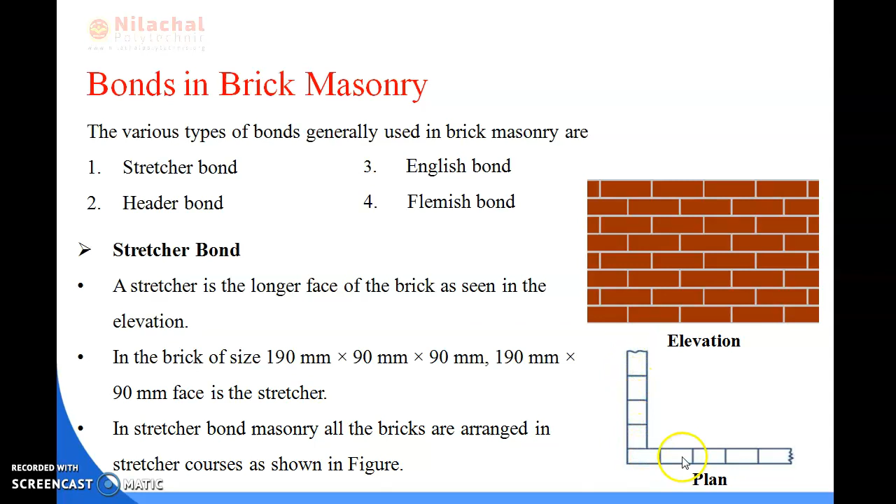In the brick of size 190 into 90 into 90, the 190 into 90 mm face is the stretcher. And in the stretcher bond masonry, all the bricks are arranged in stretcher courses. You can see here in the stretcher bond, all the bricks have been arranged in the stretcher courses. This is known as stretcher bond. This one is the elevation part, and this is known as plan. We can say the longer face of the brick has been placed in the brick masonry.

So next one, that is header bond. Header bond means it is the shorter face of the brick, as shown in the elevation diagram. You can see here the diagram. This is the shorter face of the brick. In the header bond brick masonry, all the bricks are arranged in header courses. You can see here the bricks have all been arranged in the header courses. This is the plan part and this is the elevation part.

And this is the isometric view of the stretcher bond and the header bond. This is the stretcher bond and this is the header bond. The longer face of the brick is shown here, and the shorter face of the brick is shown here.

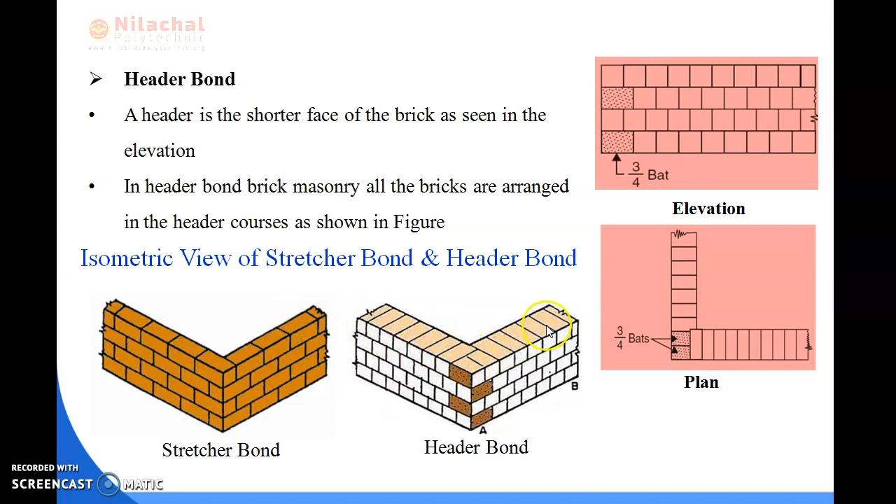So next we'll be reading about English bond. So what do you mean by English bond? In alternate courses, it consists of header and stretcher. You can see here in this line, this is row 1, row 2, row 3, row 4, row 5, row 6, row 7. If we take this one, we can say this is the header and this is the stretcher part. Same, this is the header part, and the fourth, this one, is the stretcher part. It consists of alternate header and stretcher.

So we can say the English bond is the strongest bond, and it is commonly used for walls of all thicknesses. To break the continuity of the vertical joints, a brick is cut lengthwise into two halves and used in the beginning and end of a wall after the first header. This is called queen closure.

As I have discussed with you about the queen closure, you can see that in this part the queen closure has been placed, and in this part also. So to break the continuity of the vertical joints, the brick is cut lengthwise into two halves and used in the beginning and end of a wall after the first header. This is called queen closure.

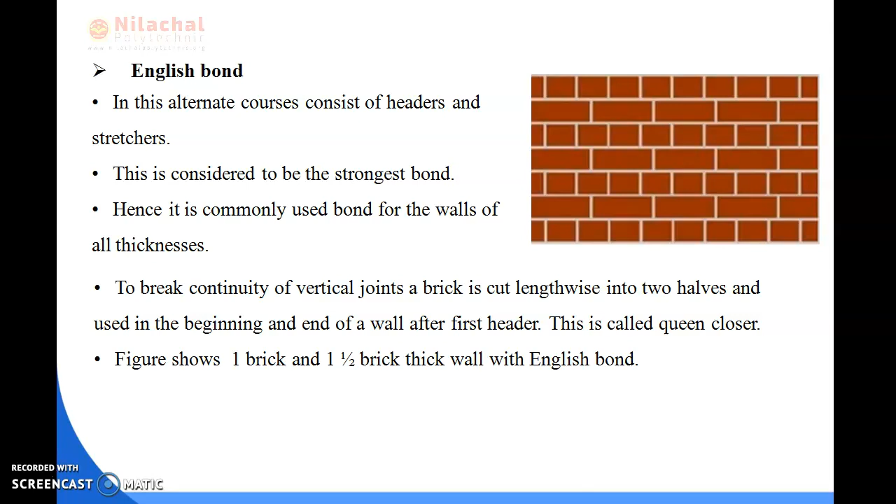Next figure here, these are the figures of the one brick thick wall and the 1.5 brick thick wall. If we construct the one brick thick wall, this is the elevation part. This is known as header. Next, this is a stretcher. Same procedure, header, stretcher, header, stretcher. This is the plan of the stretcher courses, the face part and the back part, and this is the plan of the header courses, the face part and the back part. This is known as one brick thick wall.

And in the 1.5 brick thick wall, this is the elevation part. You can see here, this is the brick header that has been placed, and this is the stretcher part. Next, same, header, stretcher, header, stretcher. So this is known as the elevation part. And here comes the plan of the stretcher course in the 1.5 brick thick wall. This is the face part and this is the back part.

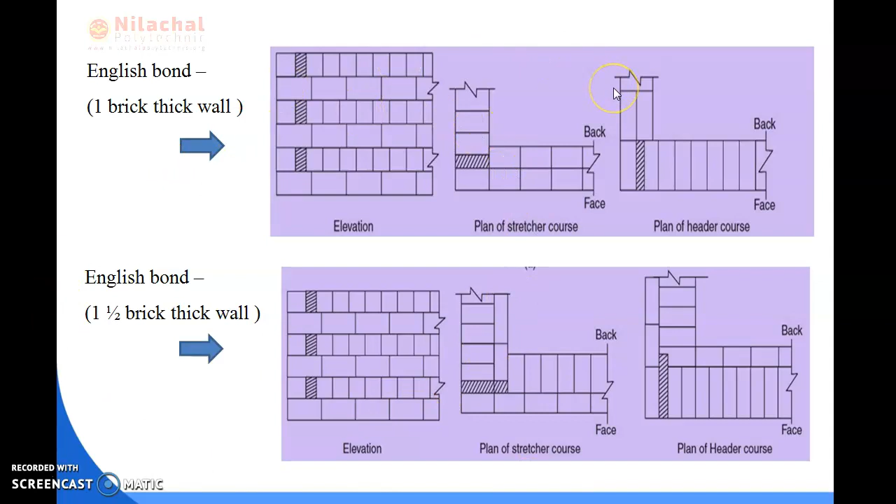And next here comes the plan of the header courses. This is the face part and this is the back part of the brick masonry. Okay, so this is all about the English bond of 1 brick thick wall and 1.5 brick thick wall.

So next we will be reading about Flemish bond. In this type of bond, each course comprises of alternate header and stretcher. Alternate courses start with stretcher and header. Each header is placed centrally between the stretcher immediately above and below to maintain an even bond. To break the vertical joints, the queen closures are required.

Okay, you can see here in this diagram, in this type of Flemish bond, each course comprises of alternate header and stretcher. We can see that this is the stretcher part, next header, stretcher, header part. The next same procedure has been followed. This is the header part, this is the stretcher part, header part, stretcher part.

So alternate courses start with stretcher and header, and each header is placed centrally between the stretcher immediately above and below to maintain an even, or we can say to maintain a Flemish bond. So to break the vertical joints, the queen closures are required.

Okay, so next we will be reading about important terms of stone masonry. What are the different terms of stone masonry? So first is string course. It is a horizontal projecting course of masonry projecting out of the face of the wall for shedding rainwater off the face. It imparts an aesthetic appearance to the structure and is generally provided at every floor level.

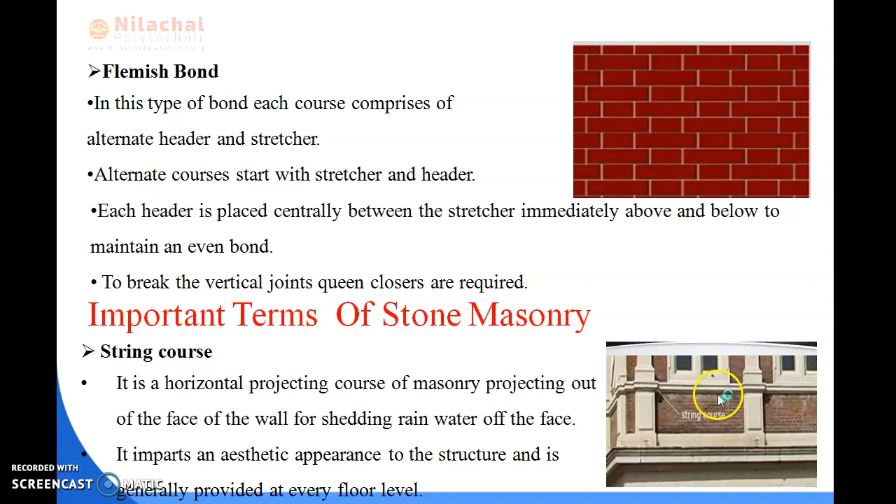So next we will be reading about corbel. So what do you mean by corbel? A projecting stone which is provided to support the joist, truss or weather shed, etc. This is known as corbel. Corbels are generally molded and given ornamental treatment.

You can see this diagram of the corbel here. This is the corbel. This is the projecting stone which supports the joist, truss or weather shed. And it is generally molded and given ornamental treatment. This is known as corbel.

And next is cornice. It is a horizontal molded projection provided near the top of a building or at a junction of a wall and ceiling. You can see the diagram of the cornice here. This is the cornice diagram, and these are the images of the cornice.

It is the horizontal molded projection provided near the top of a building or at a junction of a wall and ceiling. You can see in your houses the cornice has been provided at the top of a building or at a junction of any wall.

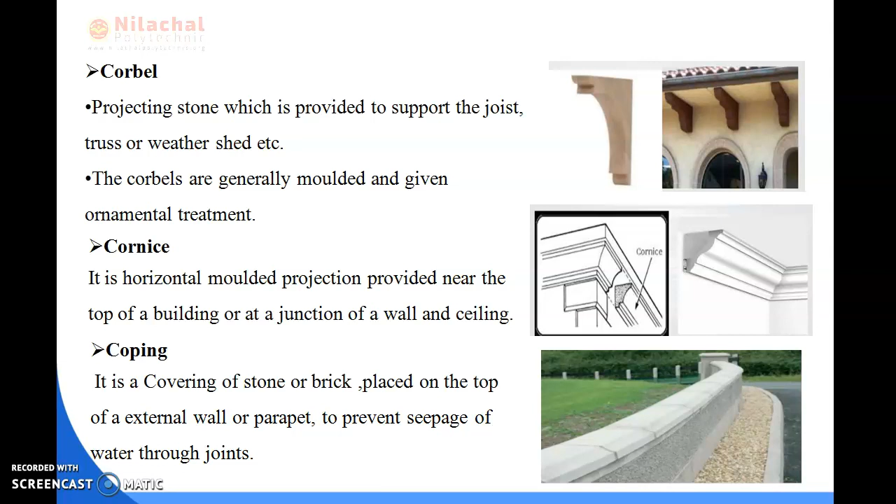So next is coping. It is a covering of stone or brick placed on the top of an external wall or parapet to prevent the seepage of water through joints. We can see here the images of coping. This is the coping, a covering of stone or brick placed on top of the external wall or parapet to prevent the seepage of water through the joints. This is known as coping.

And next one is buttress. It is a sloping or stepped masonry projection from a tall wall on the exterior of a wall. It is provided to work as lateral support of the wall. You can see here the buttress diagram in the images. It is a sloping or stepped masonry projection from a tall wall on the exterior, and it is provided to work as lateral support of the wall.

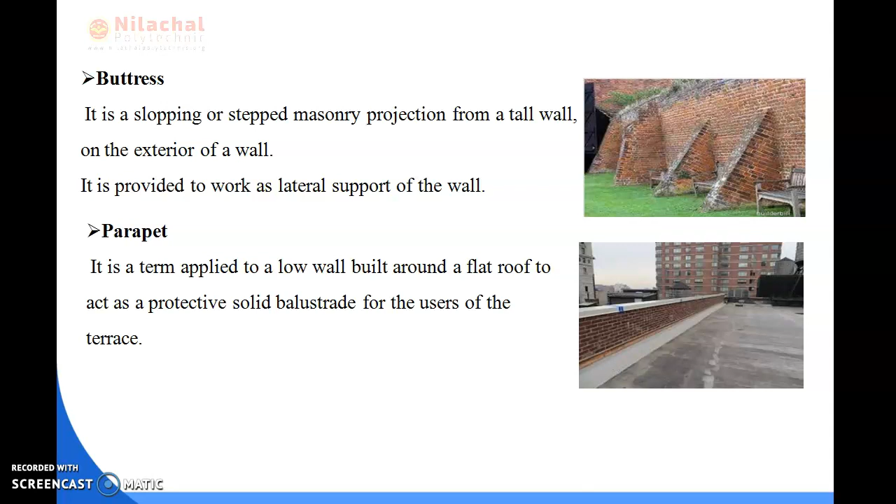Next one is parapet. Parapet is a term applied to a low wall built around a flat roof to act as a protective solid balustrade for the users of the terrace. You can see here the images of the parapet. This is the parapet wall, a low wall built around a flat roof to act as a protective solid balustrade for the users of our terrace. So these are all about the important terms of stone masonry.